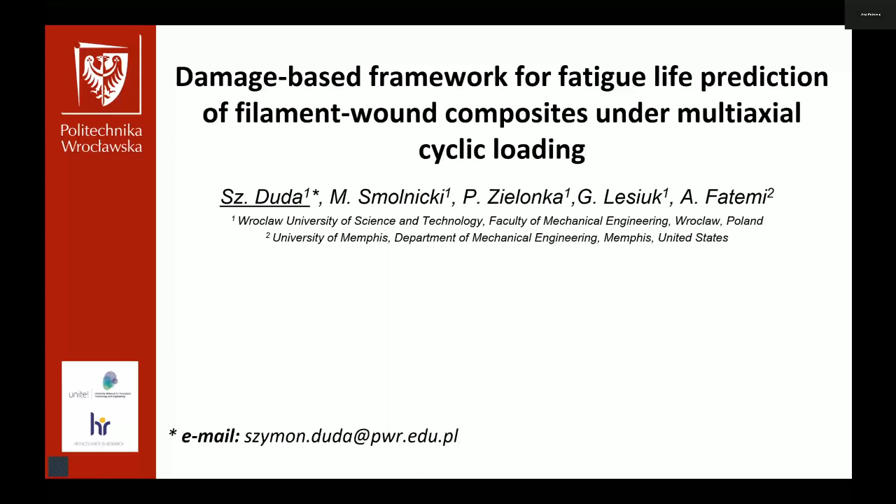Let's name the challenges. We are all familiar with multi-axial fatigue and its challenges. For composite materials, the problem is more comprehensive due to failure mechanisms that appear sometimes simultaneously, and they occur in stages, unlike in metallic materials. Multi-axial fatigue in metals is quite well described, in contrast to composites.

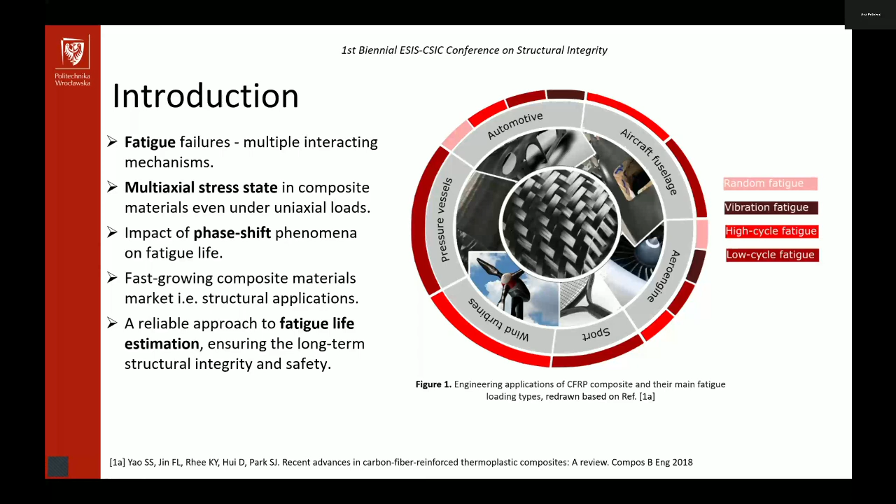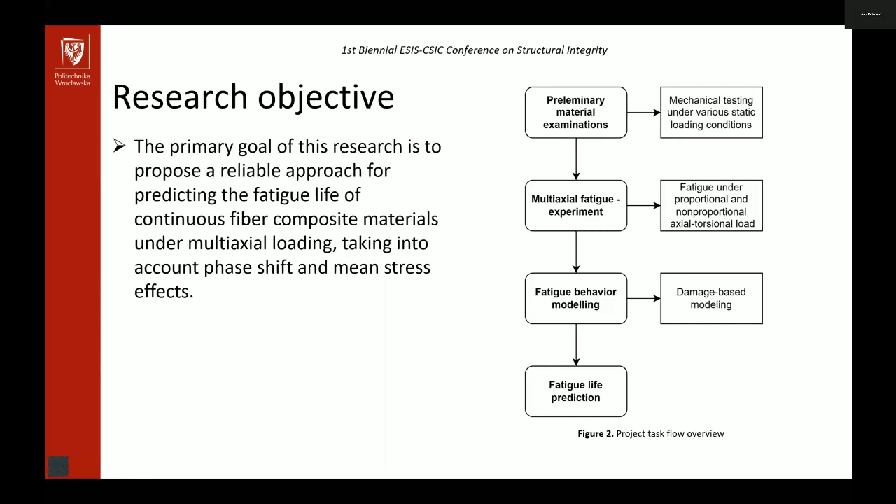The first step is material characterization under monotonic load, then multi-axial fatigue experiments, fatigue behavior modeling, and then fatigue life prediction. The fatigue behavior modeling was based on my own experimental research on CFRP, and then I took data from the literature to see how it works for similar material from the same group but with different stiffness.

First, the static mechanical behavior. Besides flat coupons used to deliver elastic properties, I investigated the mechanical performance of thin-walled tubes manufactured using a filament winding method under different quasi-static loading conditions.

For fiber composites, there are two coordinate systems. The first is the global laminate coordinate system, where X is the direction of the axial force and Y is perpendicular. But for composites we rather use the material coordinate system for one lamina, denoted 1, 2, 3, where 1 is the direction along the fibers and 2 is perpendicular.

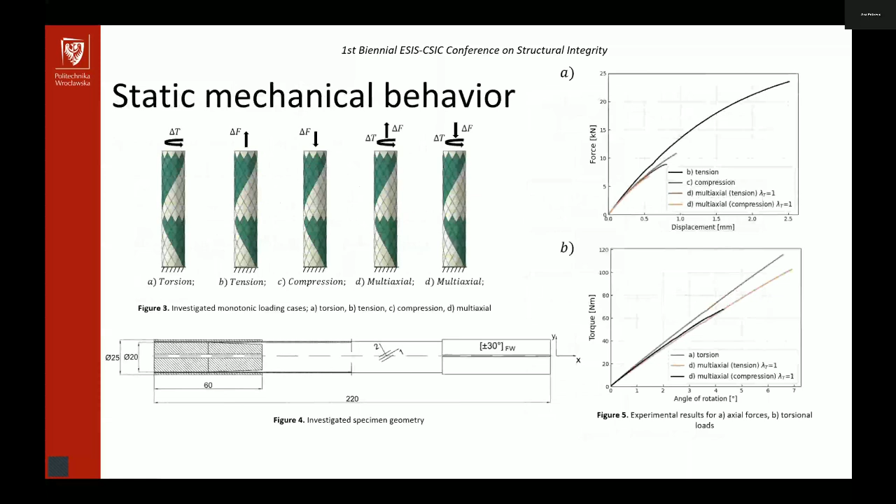You can see on the right side the results from the static investigation. Okay, so the material - now it's correct.

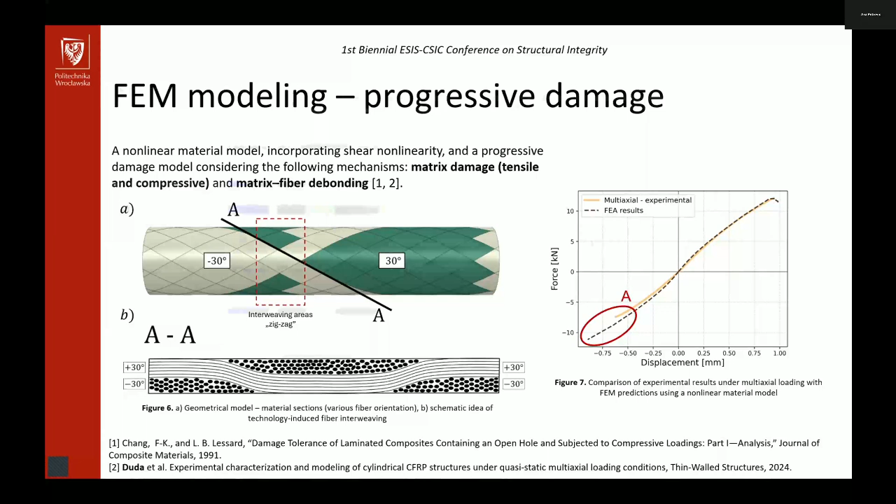A couple more words about it: the model includes a nonlinear shear material model with progressive damage. Now, the model verification.

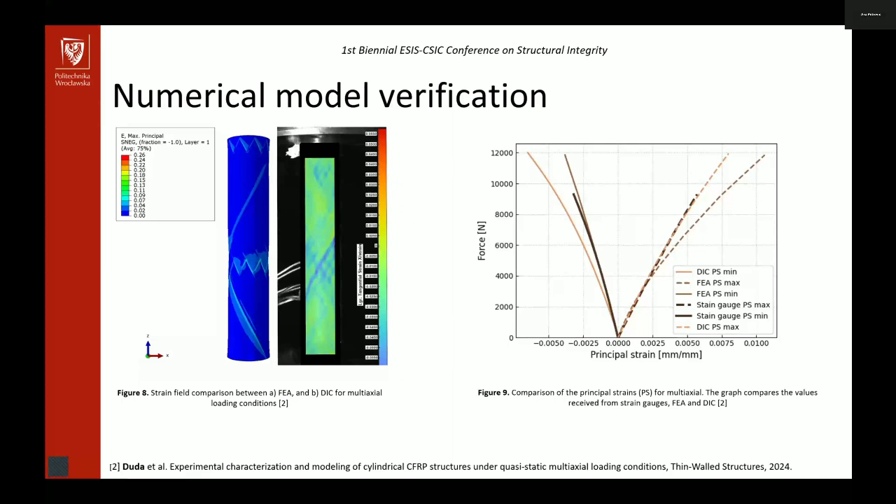After the static experiments, we move to the fatigue experiments. Like in the previous presentation, the test was done on an MTS system 809, axial-torsional machine, using a biaxial extensometer. The experiment was also enriched with an acoustic emission sensor, though I will not present those results in today's talk.

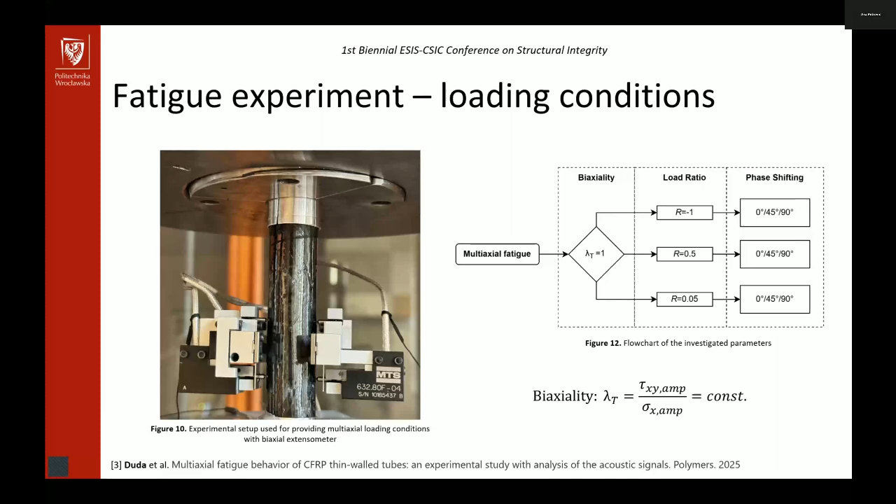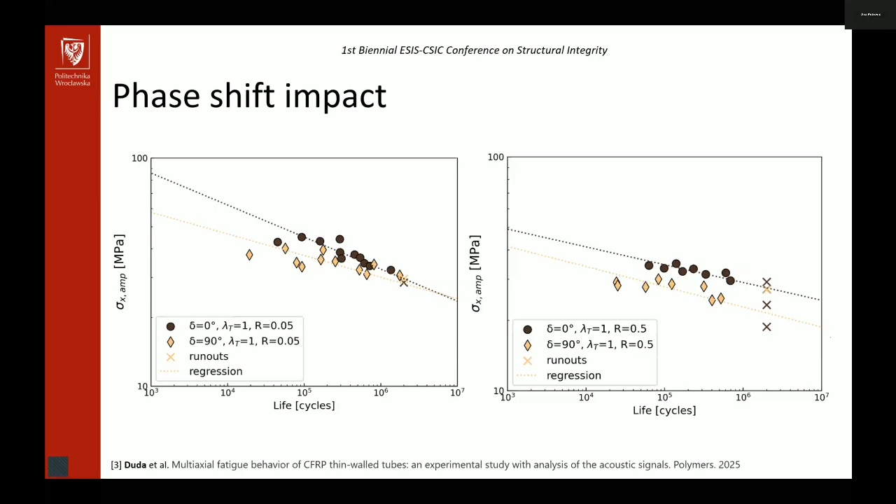In general, the fatigue life results in lower life. This is an important point: those SN curves are plotted for the geometrical stresses, sigma x amplitude. We see in both cases the same effect for R equal 0.05 and for R equal 0.5.

If we think about the mean stress impact, since different load ratios were investigated, the situation is similar, especially for 90 degree out of phase load, as well as for R minus 1. That's why I excluded the data at this stage for analysis, since the effects were not properly visible.

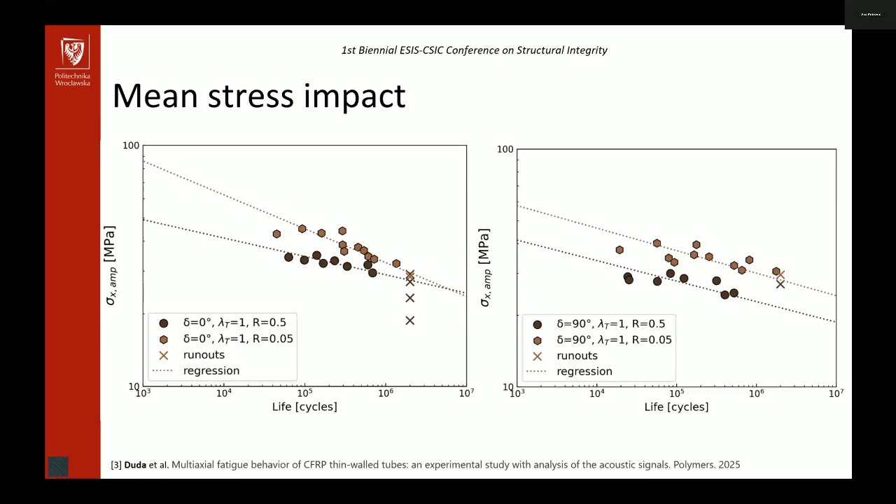So same as before, if we consider the positive load ratios, in-phase load, out-of-phase, we see that the fatigue life differs if we include the mean stress. For higher mean stress, the life is lower in both cases, so for in-phase and out-of-phase loading.

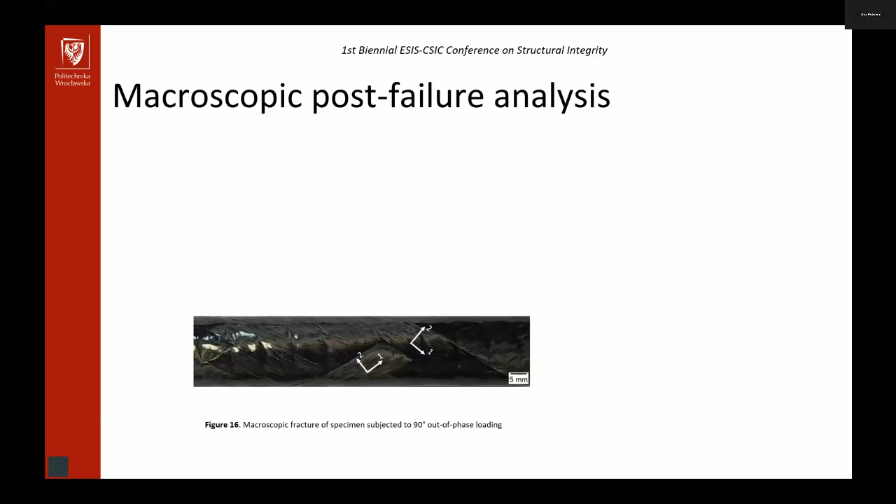So we have the fatigue experiments, the SN curves. Now we did macroscopic post-failure analysis, and in all specimens that we tested, the crucial area was this interweaving area where the damage was observed. Of course it was the damage that led to the final failure of this composite.

We see that there was fiber breakage, which is quite obvious. But besides this, we observe delamination between the layers. I would like to add that for this specimen, the fiber orientation is plus minus 30 degrees.

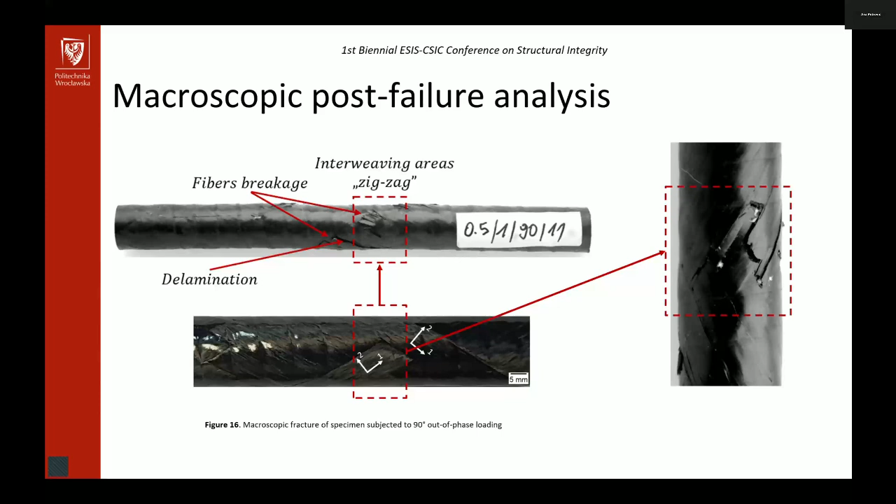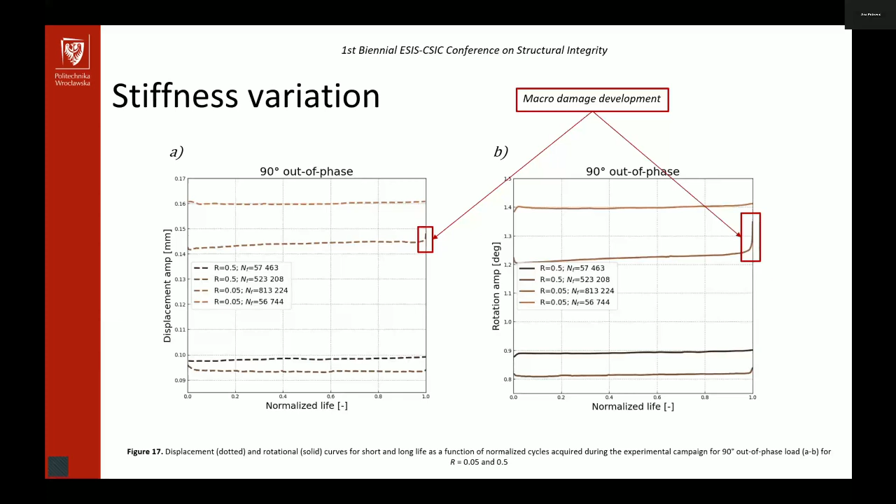Now, stiffness variation has been presented for the displacement amplitude, and we see the gradual change in displacement. The fatigue test was force controlled, and in the last stage we see some progressive change in displacement, which we associated with macroscopic damage development.

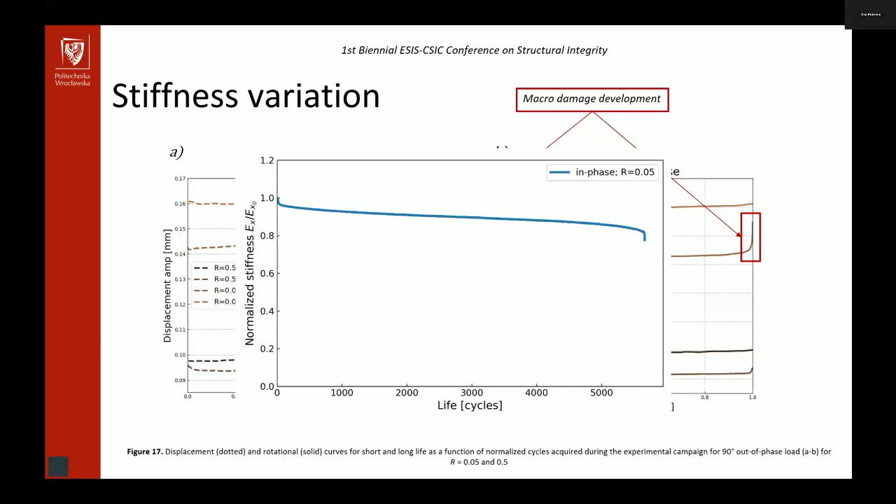It can also be seen here, from the biaxial extensometer, and we see a gradual and linear decrease in normalized stiffness.

All right, so now actually the most important part is the modeling of the damage. We decided to choose the concept known as the critical plane approach. There are some reasons for that: the first is that it accounts for the physics, and also it is quite simple because it requires only a proper stress analysis.

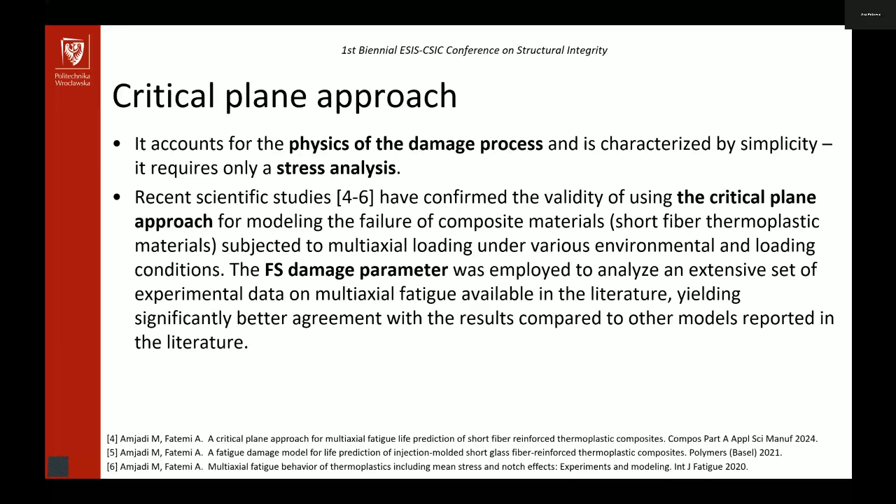Moreover, there are some recent papers which show the applicability of this approach in terms of short fiber composites. That's why that was, let's say, the current direction which we wanted to see and investigate.

So, the damage parameter formulation. Based on the literature review and the experimental observation that we did, we assume that debonding is crucial in terms of the investigated structure.

The driving force which causes the debonding is governed by the shear stress tau 1,2, and another component which also has an impact on this damage process is sigma 2 maximum. This damage parameter has been used to calculate the damage at a critical point, and the plane of damage initiation was assumed as the maximum value of this.

In this case, since we take into account the stresses along the first and second direction, there are only two directions, since I have just two layers, plus minus 30 degrees.

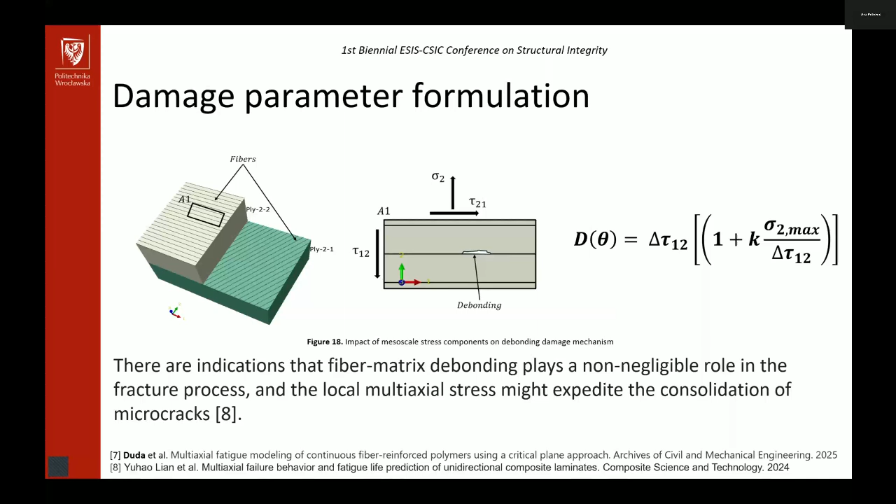Moving on: stress analysis based on the developed numerical model, which includes this fiber interweaving area. This is important because there is a significant stress concentration. For the critical point, which is associated with the stress extrema point, we calculated the damage.

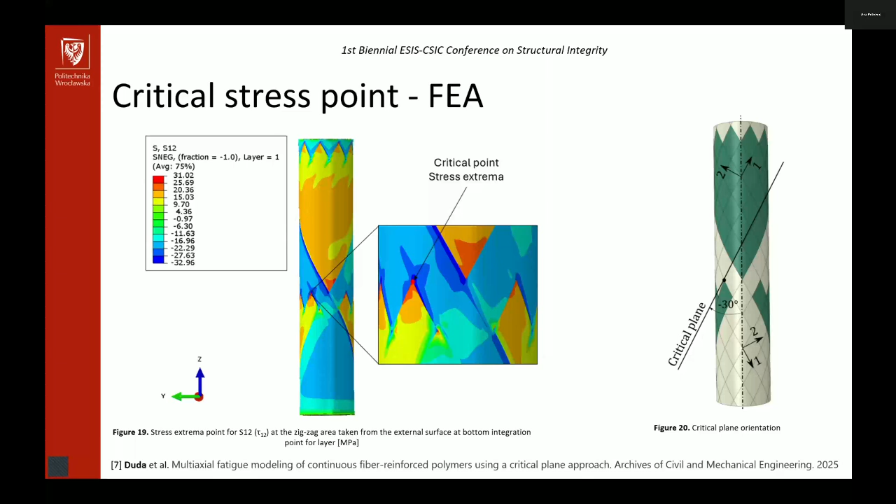You can find a more detailed description of the results in our paper, published in Archives of Civil and Mechanical Engineering this year.

So the damage correlation calculations are presented here, the results connected with the damage parameter have been shown here. We see R equal 0.84, with 90% prediction intervals.

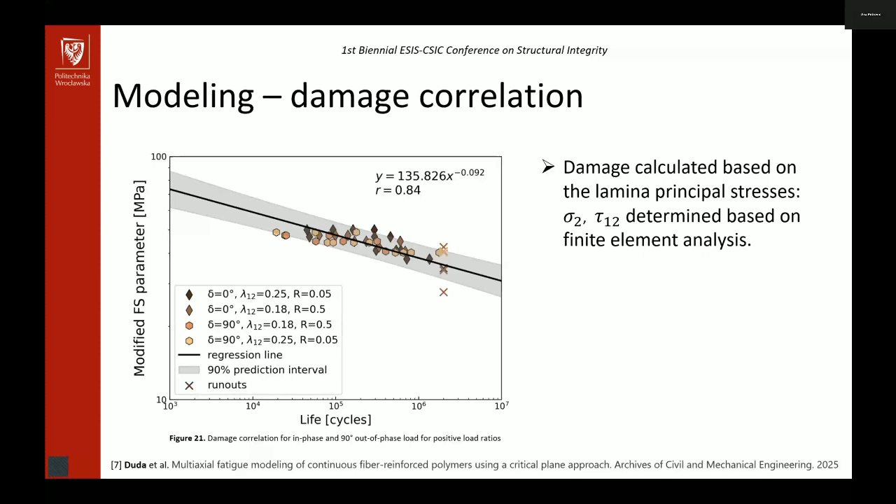Based on this, the damage was calculated not based on the stresses plotted on the SN curves, the geometrical ones. They were calculated based on the finite element model for the mesoscale stresses, sigma 2 and tau 1,2.

So for the fatigue life prediction, based on this, we decided to propose a quite simple method. We calculate the damage for 1 million cycles and associate it with the uniaxial load which can generate the same damage value, and then correlate this with the UTS value.

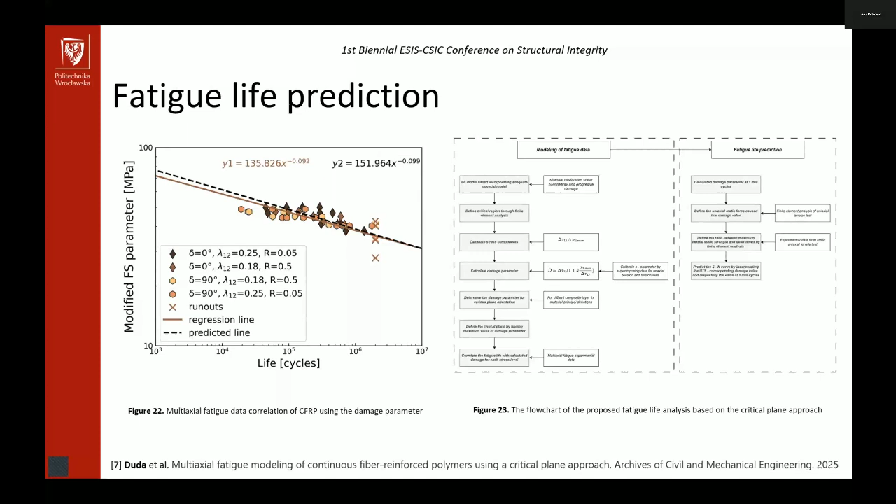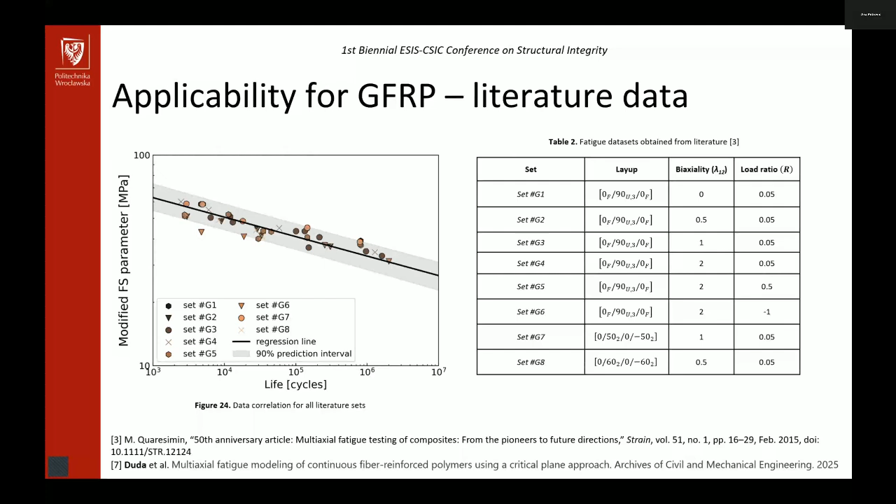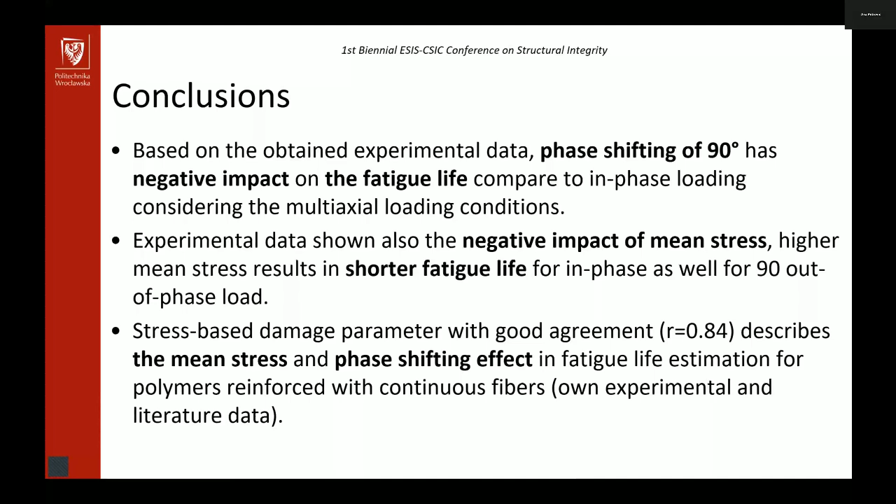So let's move to the conclusions. Based on the obtained experimental data, the phase shifting has a negative impact, as well as the mean stress, which results in shorter fatigue life. The stress-based damage parameter, with good agreement, describes the mean stress and phase shift effect in fatigue life estimation.

I would like to also present the data that I'm currently working on. I'm trying to implement and see the applicability of additional parameters which affect the fatigue, such as biaxiality—lower biaxiality of 0.5 means the normal stress, the geometrical one, is twice the shear.